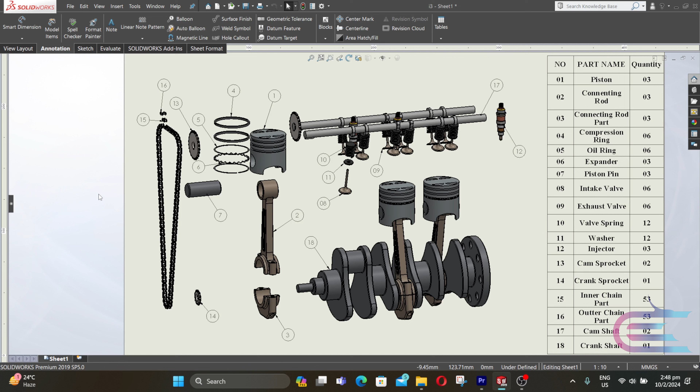Click on Insert Component, then go to Sprocket Chain, press Ctrl and select Cam Sprocket and Crank Sprocket. Now place it.

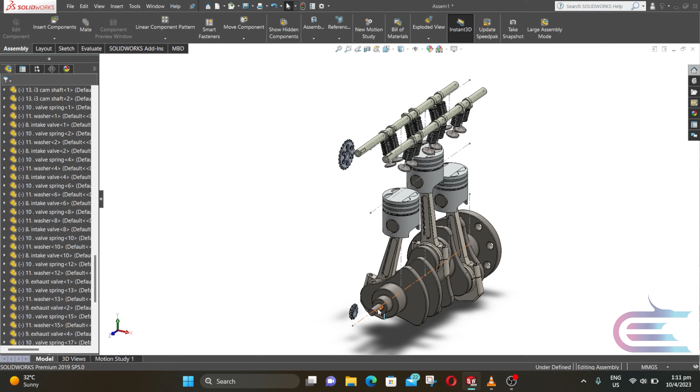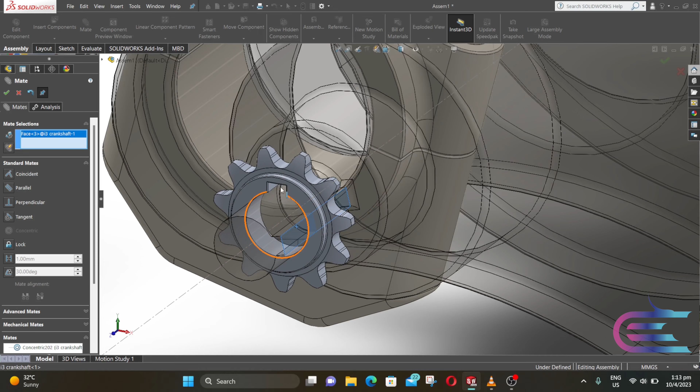Click on this surface, press Ctrl and select the internal surface of the gear, then click on Mate. Select Concentric and click OK. Now select this surface and this surface. Select coincident and click OK.

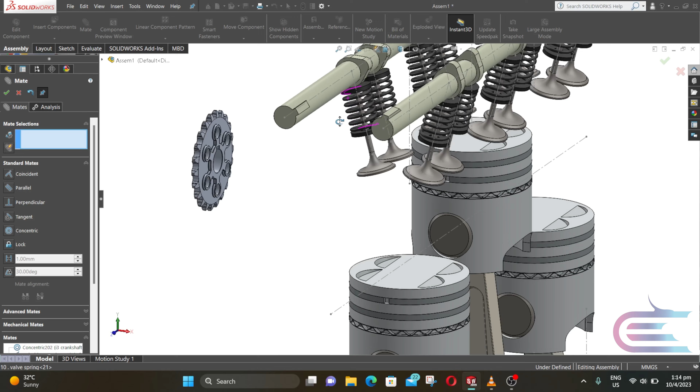Now select these two surfaces. Select concentric and click OK. Now select this surface and this surface. Select concentric and click OK.

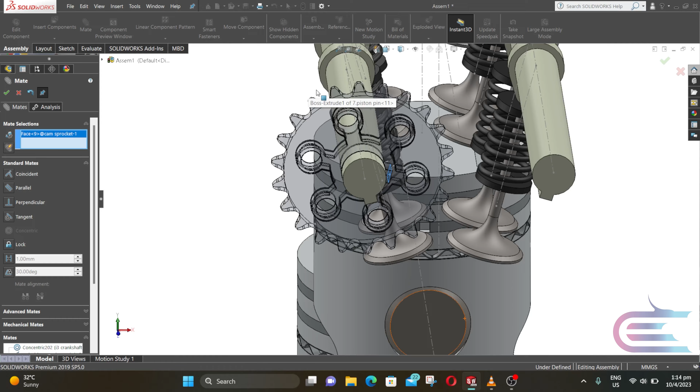Now drag it here. Select the key slot surface of the camshaft and cam sprocket. Select concentric and click OK.

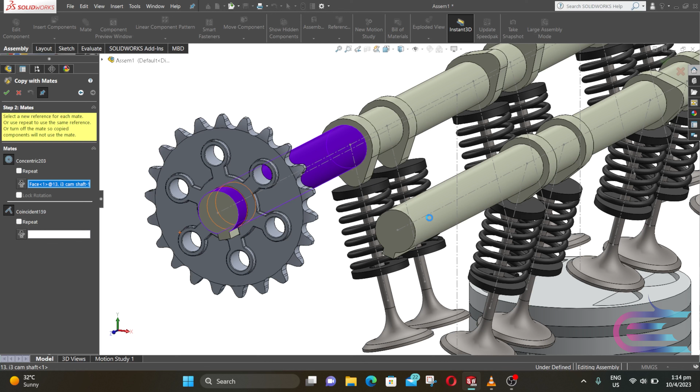Now close mate, expand insert component and select copy with mates. Select this cam sprocket, then click next. Select the camshaft surface and now select the camshaft key slot surface. Then click OK.

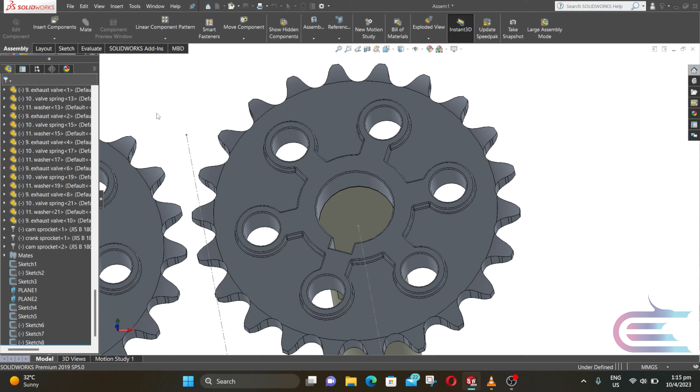Now we have to select the midplane of the camshaft and crankshaft, then mate it. Expand the crankshaft and select plane 4, which is the midplane, then expand camshaft and select plane 4, which is the midplane of the camshaft. Click on mate, select coincident and click OK.

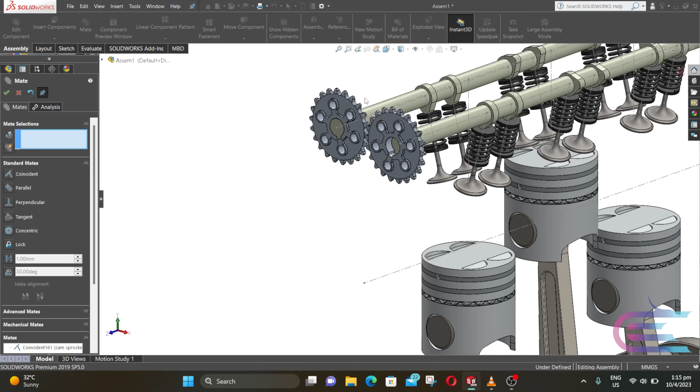Now select this surface of the camshaft and this surface of this camshaft. Select coincident and click OK. Now the midplanes of all three sprockets are in the same plane.

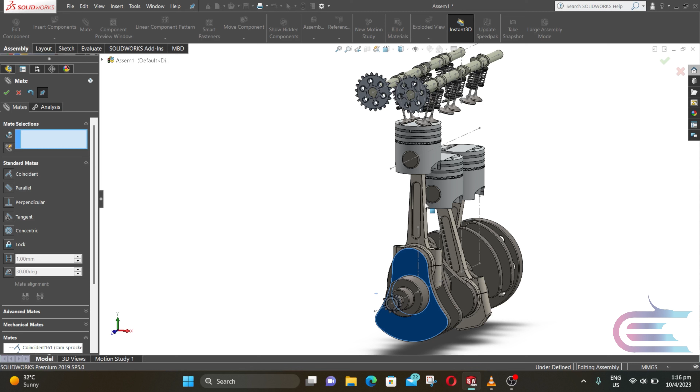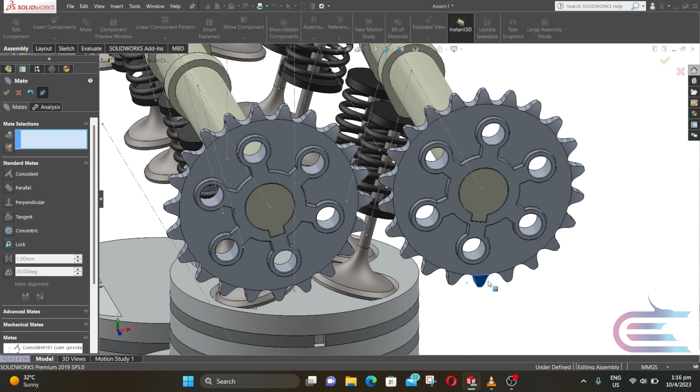Now we have to synchronize all the components of this engine. First, we rotate the crankshaft to the piston top dead center. Now we place the intake valve at the beginning of the intake stroke. Here the engine rotation is clockwise. Place the intake valve almost open, and place the exhaust valve almost closed.

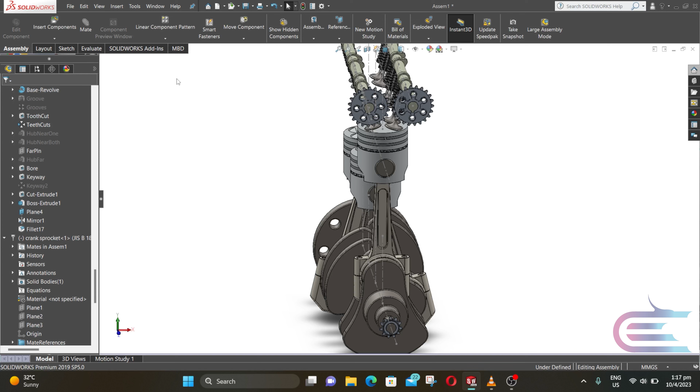Now close the mate. Expand assembly and click on belt chain. Select the circular edge of all three sprockets. Here chain is previewed, but we want it at the middle plane, so expand the assembly.

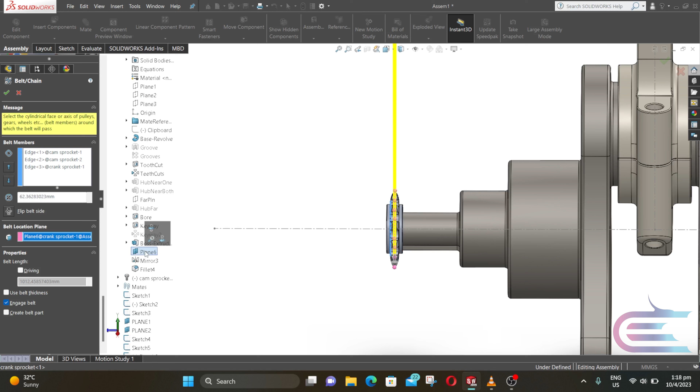Now select plane 6 of the crank sprocket, which is the mid plane of the crank sprocket. Click on use belt thickness and input parameter is 5 mm. Then click OK.

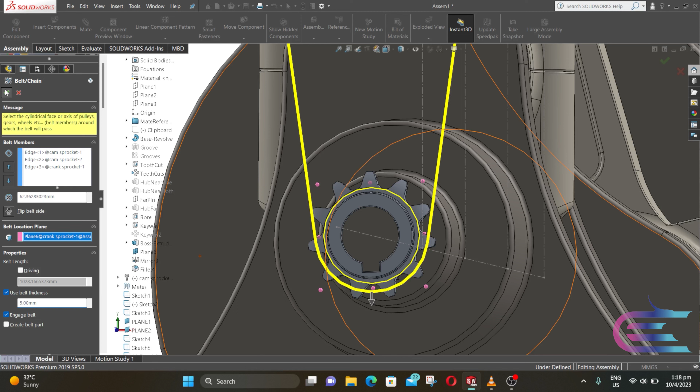Now click on insert component. Go to sprocket chain and select the chain inner part and chain outer part, then click here to place it. Now expand linear component pattern and select chain component pattern. Select the third pattern.

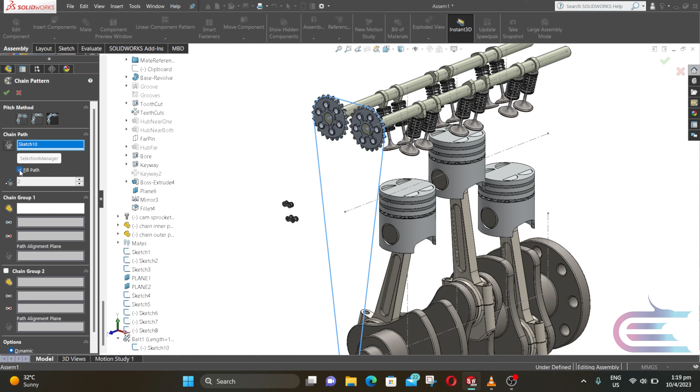Expand assembly, then expand the belt and select this sketch. Click on fill path, then click on chain group 1. Select the inner part of the chain, then select the circular surfaces, both of them. Now it asks for path alignment plane, so expand this part of the chain and select plane 1, which is the mid plane of this component.

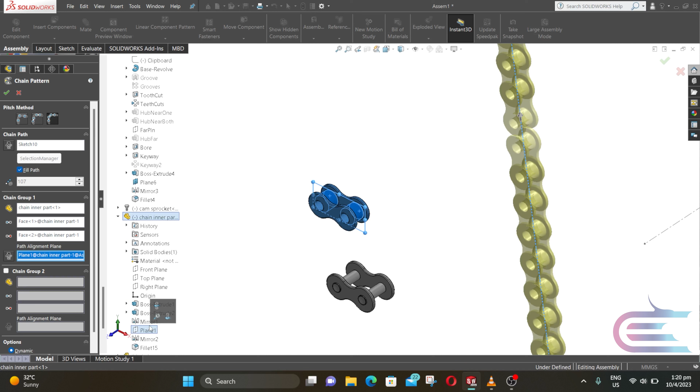Then click on chain group 2. Select the outer part of the chain. Now it asks for 2 circular surfaces, so select the 2 circular surfaces. Now it asks for path alignment plane, so expand this component and select plane 2, which is the mid plane of this component.

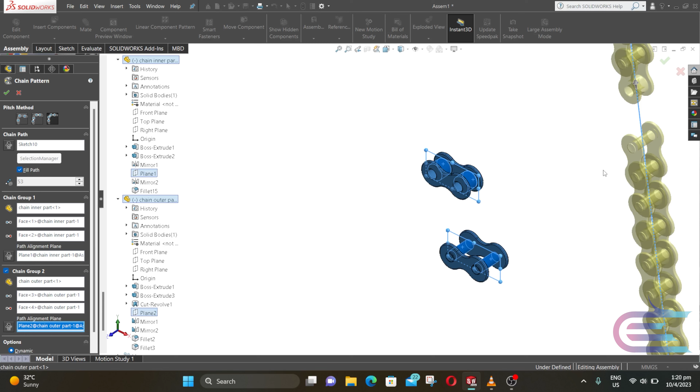Now you can see there is a gap, so deselect fill path and increase one more component, then click OK. Now it is completed.

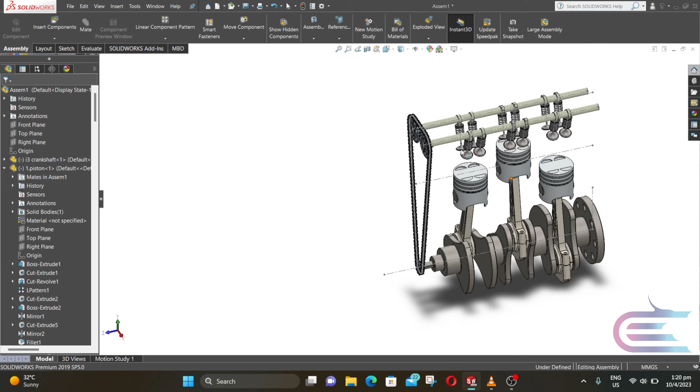Now press Ctrl and select this surface and this surface, then click on Mate. Expand Mechanical Mate and select Gear, then click OK.

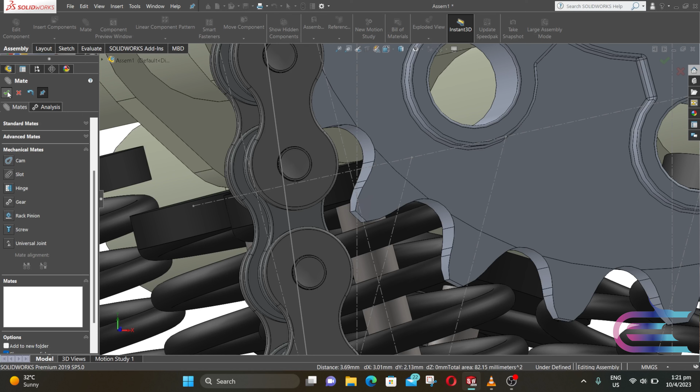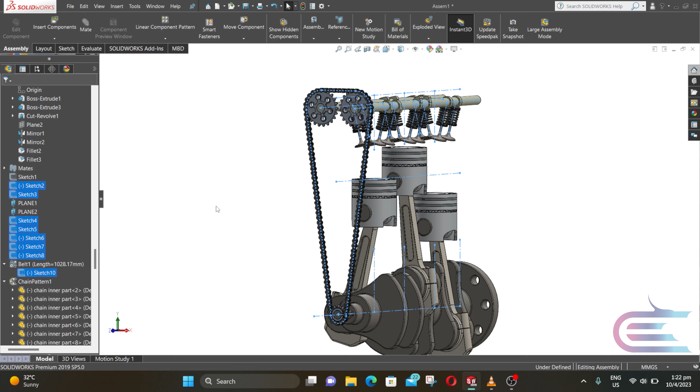So the assembly is completed. Now we need to hide this sketch, so press Ctrl and select all these sketches. Right click over the sketch and click on Hide. So all of them are hidden and the assembly is completed. Now rotate the crankshaft and check it.

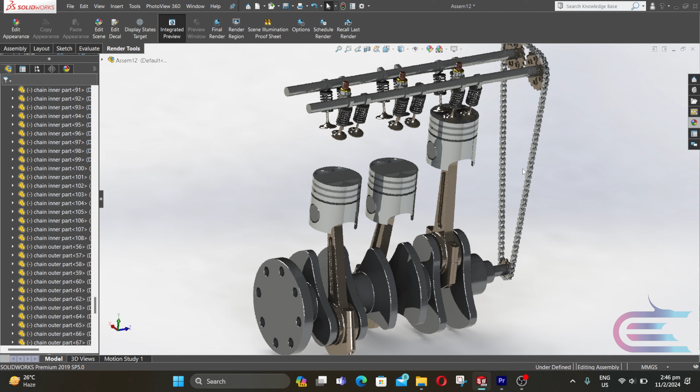Now we are going to assemble with the belt and pulley method. So from insert, select cam pulley and crank pulley, then place it.

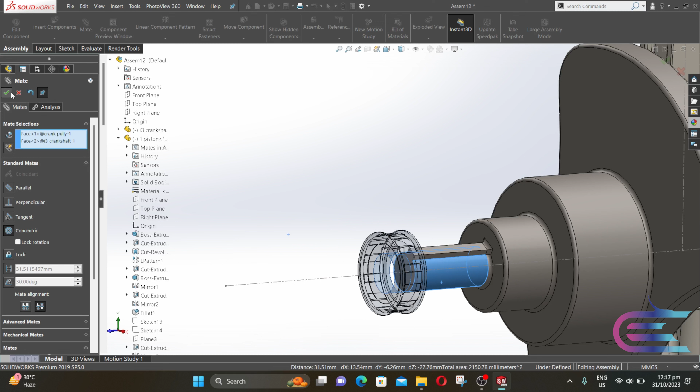Press Ctrl and select this surface and this surface, then click on Mate. Select concentric and click OK. Now select this surface and this surface. Select coincident and click OK. Now click on the key slot surfaces. Select coincident and click OK.

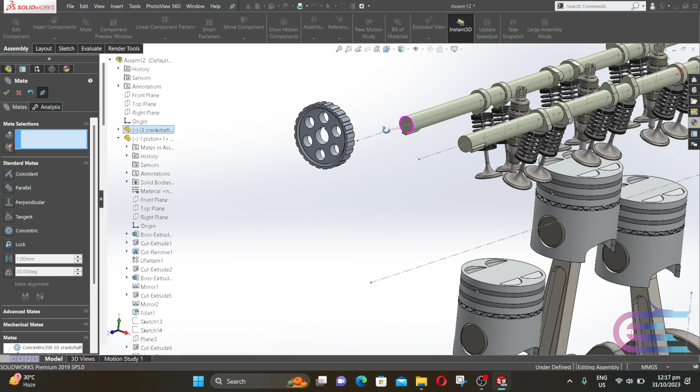Now select this surface and this surface. Select concentric and click OK. Now select these two surfaces. The edge is selected here, so delete the edge and select this surface. Select coincident and click OK.

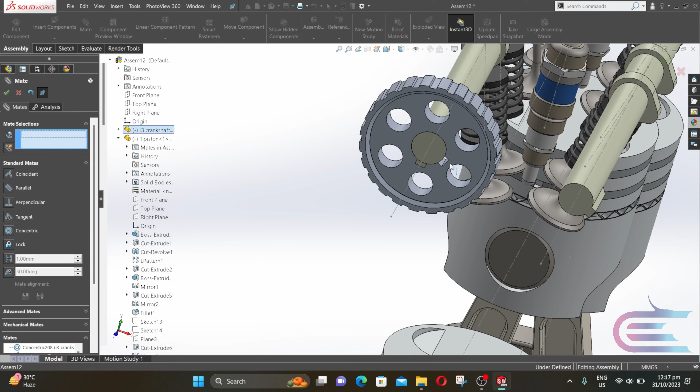Now rotate the cam pulley. Select the key slot surfaces. Select coincident and click OK. Now close the mate, expand insert component and select copy with mates.

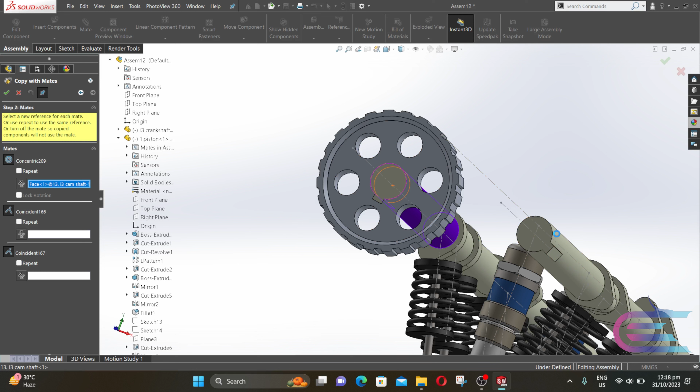Select the cam pulley, then click on next. Now select the surfaces as the color changed in the adjacent camshaft.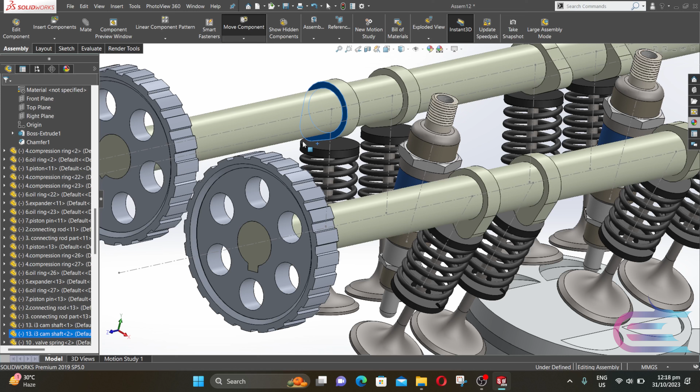Now close the mate. We have to synchronize the components of the engine. First, we place the intake valve as the intake stroke is about to begin, so the valve is almost open and the exhaust valve is almost closed. Now place the piston to the top dead center as occurs in the intake stroke.

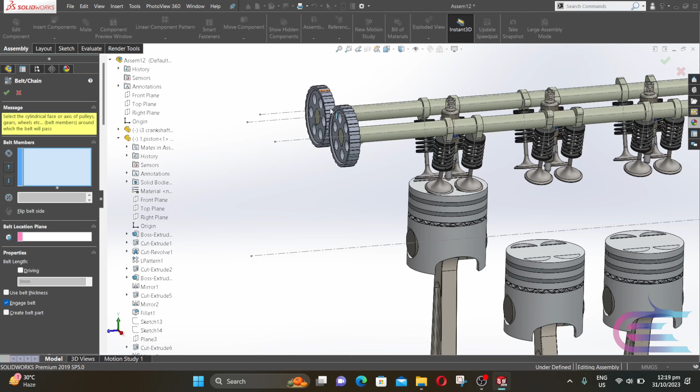Now expand assembly and select belt chain. Select the outer surface of both pulleys, and this crank pulley also. You can see the sketches at the middle. Then click on create belt part.

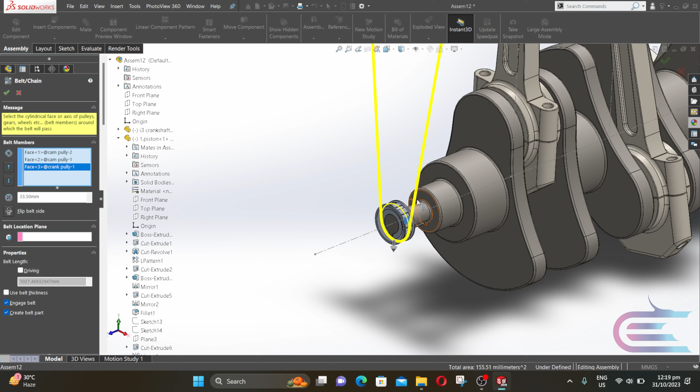Now close the mate. Go to the bottom and expand belt. Right click over the belt component and select open part. Now right click over the right plane and select normal to. Right click again and select sketch.

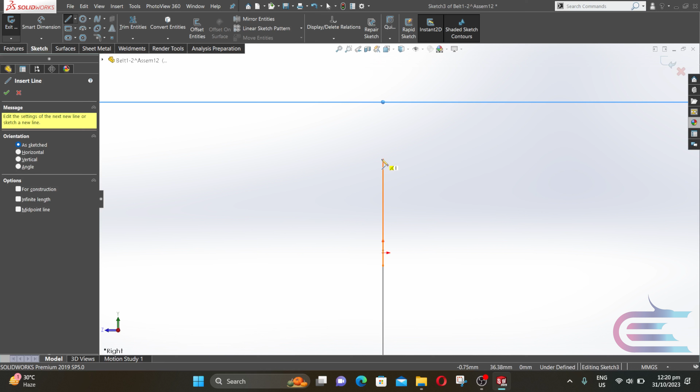Now select line and draw the belt cross section. Press escape. Then select this line, then click on for construction. Then click OK.

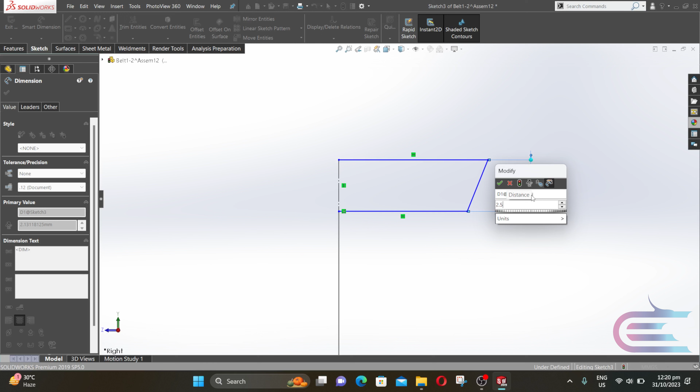Select smart dimension. This distance is 2.5 millimeter, and this angle is 120 degrees. This line is 4 millimeter.

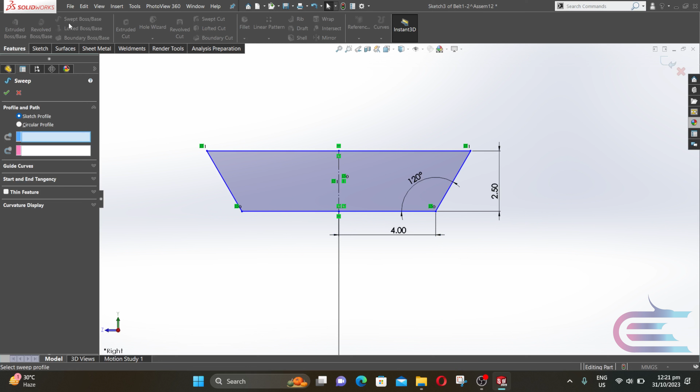Now select mirror entities, select the sketch and mirror about the center line, then click OK. Now go to sweep boss base and select the sketch and select the belt path, then click OK.

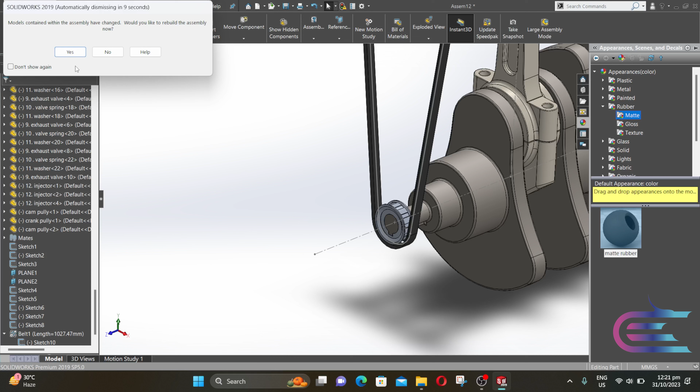Now click on appearance, select rubber and then select matte rubber. Then go to the assembly, click OK for rebuild. Now you can see the assembly is completed.

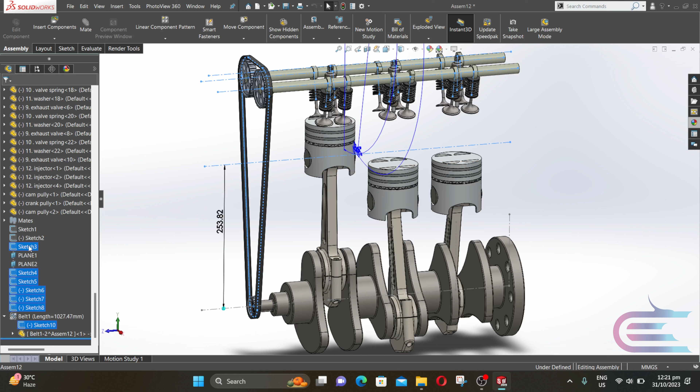Now select all of these sketches. Right click over the sketch and select hide. Now rotate the crankshaft. All the components are moving properly.